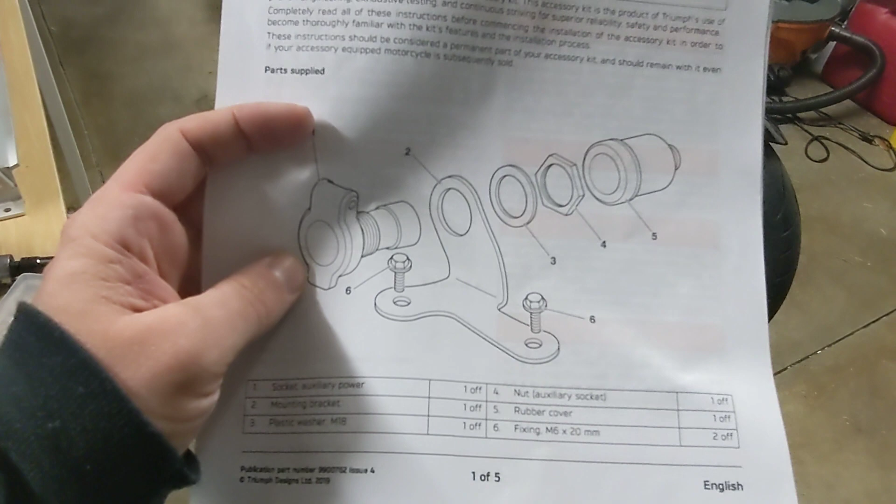This seems a little tricky because the instructions are a bit vague. They just say basically to undo the tank bolts here, tank attachments, and look for a taped up wire.

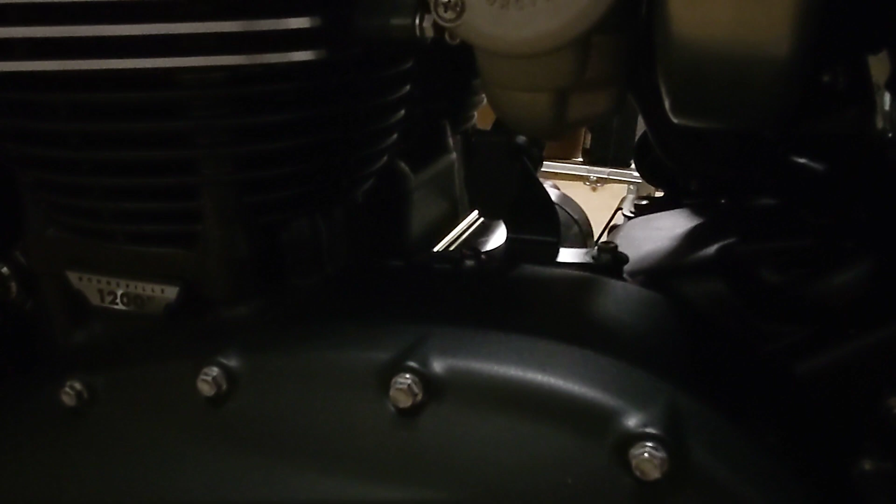Now I'll go ahead and show you the adapter itself. It's right down there. Let me get the light to work in my favor here. There you go. So this is a bit odd to me, the location of it.

I guess it makes sense because it's a slim down style bike. But if you're going to have something powered and running on your bars, then it's going to be a little odd, running a wire up past the motor up to the bars. Maybe a heat resistant silicone wire or something like that would work out okay. But that's just USB if I were going to power that from there.

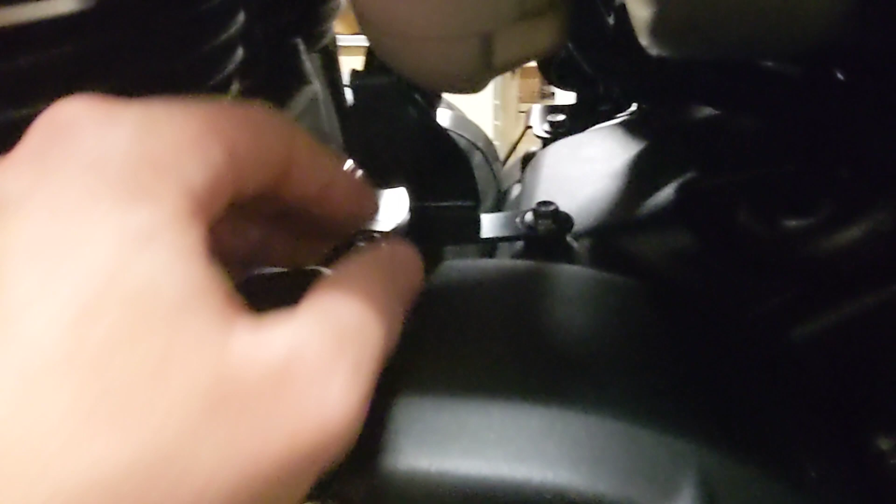It's a good spot if you were going to do heated gear, and maybe that's more what they were inclined to here. So this is the DIN style power adapter. I can zoom in on that. So it's not USB or anything directly - you would need an adapter for that.

Now, my bobber already has a power adapter back here going right to the battery, and this would be like for your trickle charger or battery monitor or anything like that. But that's going directly to the battery, and this one's actually going to the factory connection under the tank.

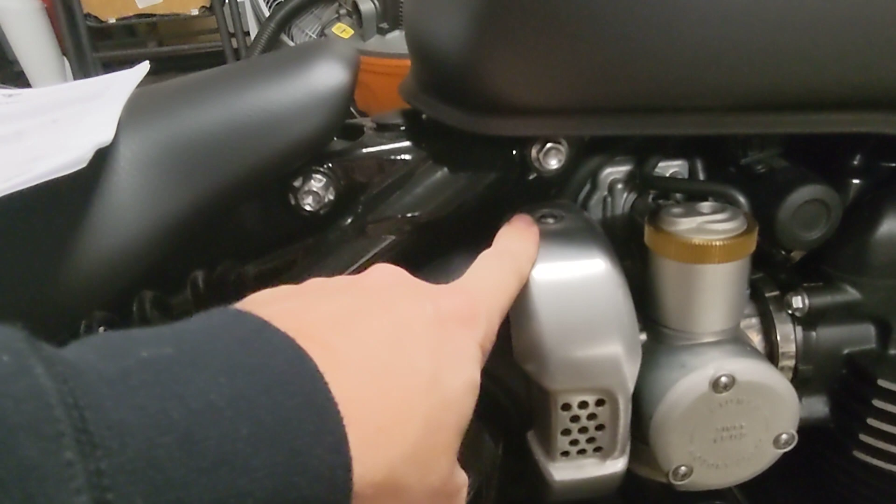When you remove the two tank bolts - I showed you the one on the other side, and there's one here as well. I can't remember the size of the screw on that, but it's in the kit number.

You can find the instructions with the kit - they come with where to go and look for the instructions, at least mine did. I think mine came from Adept Power Sports or something like that, but you can buy this kit at pretty much any authorized Triumph distributor, I think.

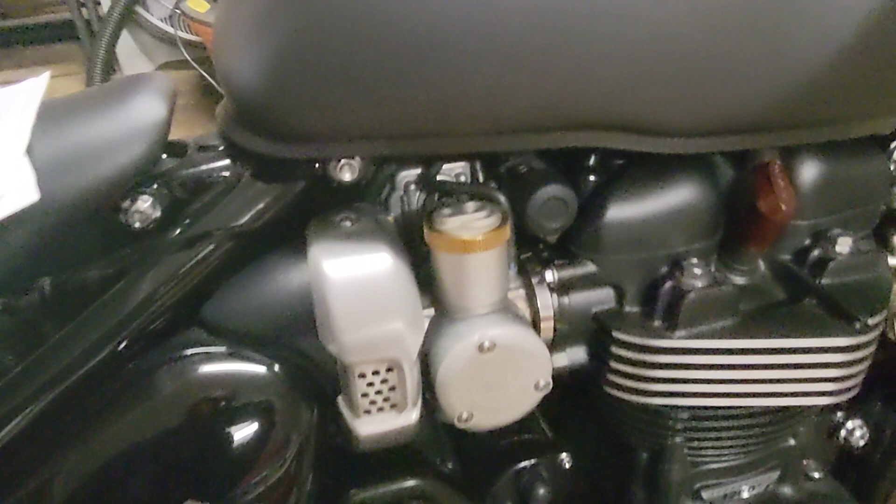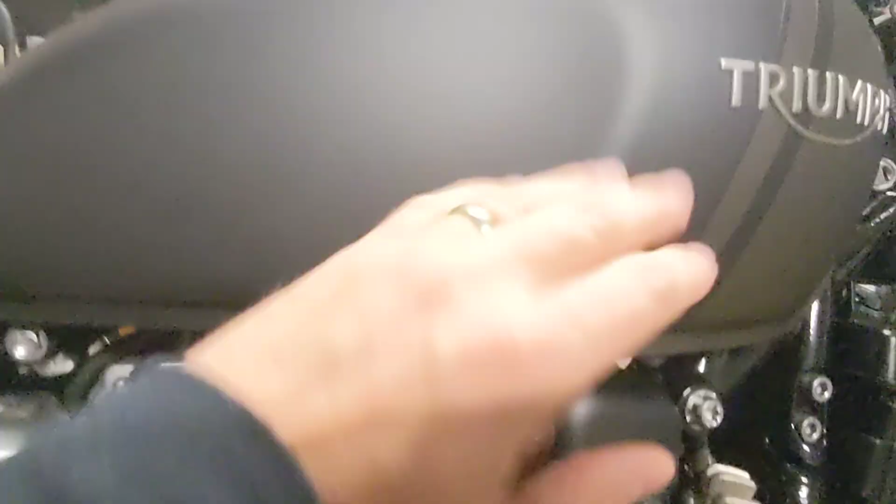So you can see this is what it looks like from the back side. The wire is actually on this side of the tank, so this is the right side of the bike. Right about in this area, I'm not going to take it off now, but right about in this area, it's actually taped up and bundled up on the top here.

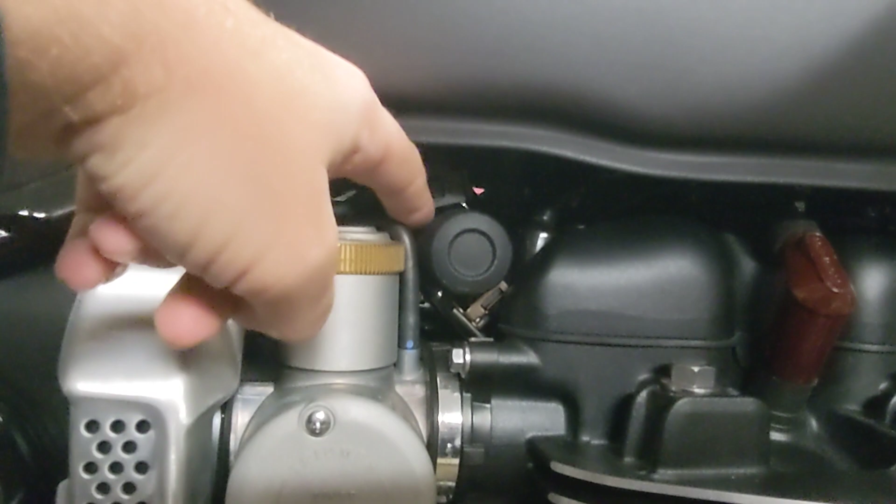At least that's where it was on mine. There's just enough wire for when you take it out - you run it down in between the throttle bodies and the engine block here, and it comes out right here.

Then, as seen right here, this part on the back, number 5 there, is the rubber sleeve, and then that plugs right into the back of the power adapter there.

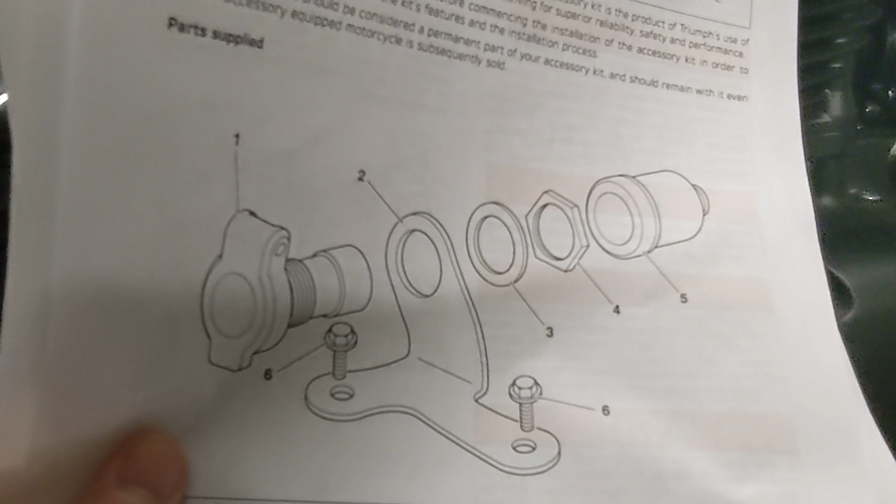Now, there is a clear plastic coating on mine sealing it, and they already had electronics grease on the plug. So all I had to do was cut that clear plastic coating off and plug it right into the back there.

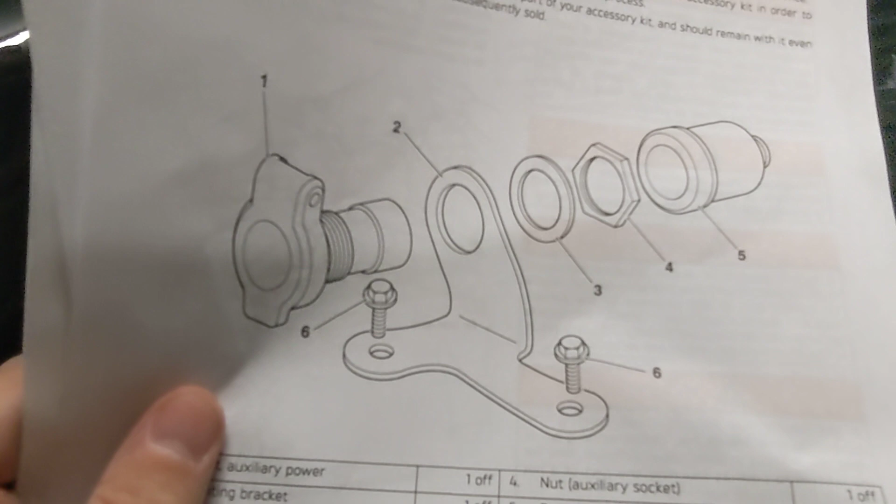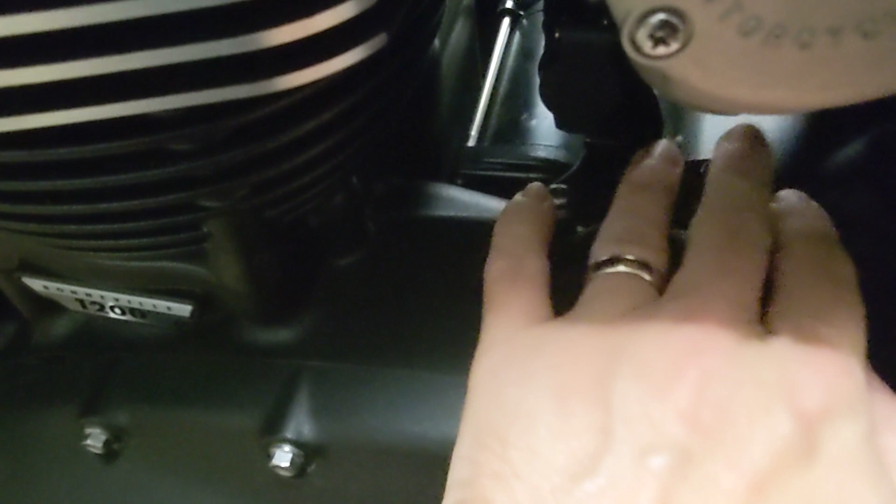And then from there, you just take and 2 bolts on this side, or 2 screws on this side, go right into the ring here. There's 2 plastic plugs that are normally in these holes.

You would just take those 2 plastic plugs out, and whenever you go to put the bracket on, it's probably a good idea to connect it before you try to screw these down, because it's a little fiddly if you try to do it the other way around.

So for me, I wound up disconnecting it, reconnecting it there, getting everything nice and good on the plug, and then securing this down. Just make sure you don't have too much cable or too much tension on the cable in the back if you do that.

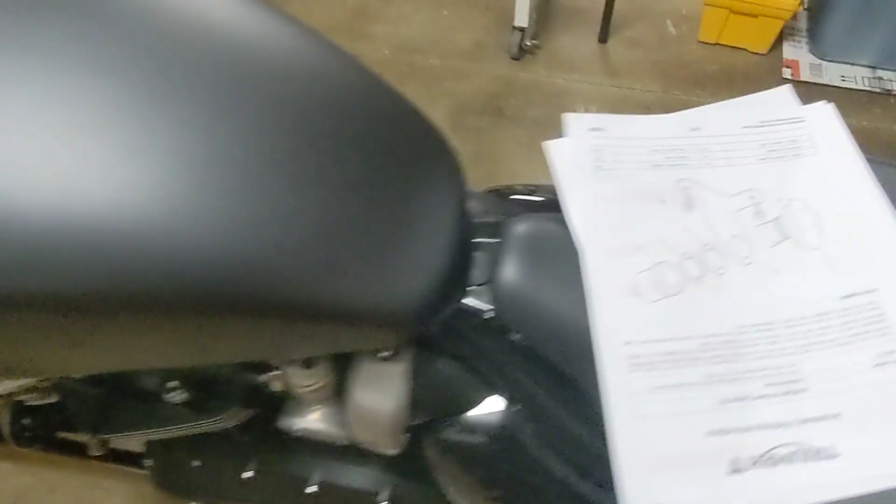So I haven't actually gotten to test mine yet. I did measure it with a meter and it checks out fine, but you be careful doing that because it'd be really easy to short that out.

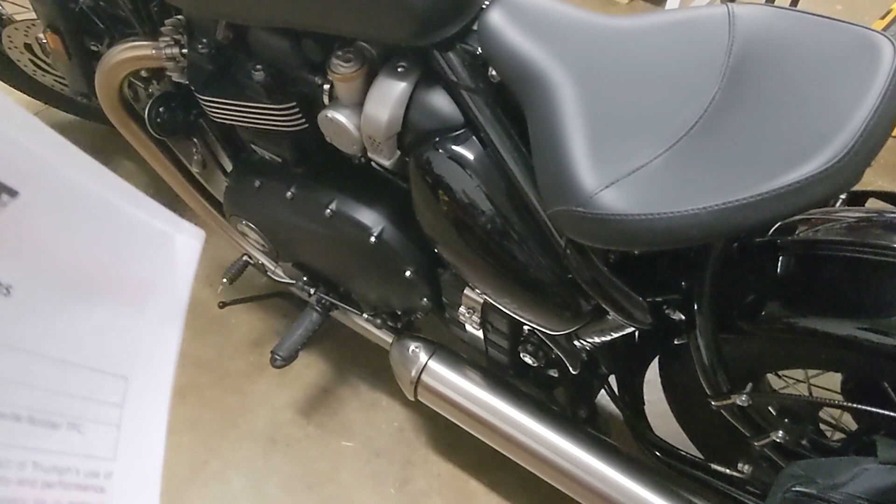They do tell you to disconnect the battery if you're going to do this, and you can pretty easily disconnect it, so that's not a huge deal. I've done that before when I installed my power regulator or my flashing rear light. But yeah, I'm looking forward to trying that out.

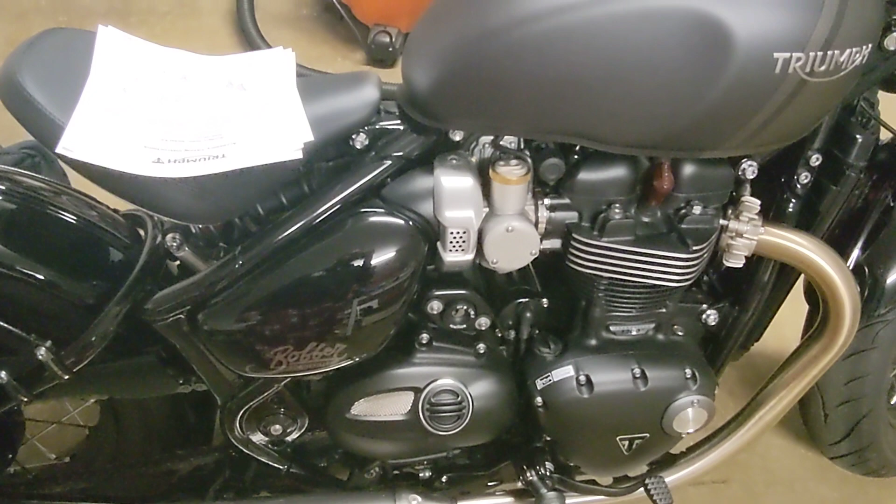I haven't actually gotten to go on the road and test it out yet. I just installed this the other day. I didn't see a lot of content about where that wire was on the bobber, and I forgot to take any pictures. If I can find some pictures I've done with this, I'll try to post those, but I don't think I have any direct ones.

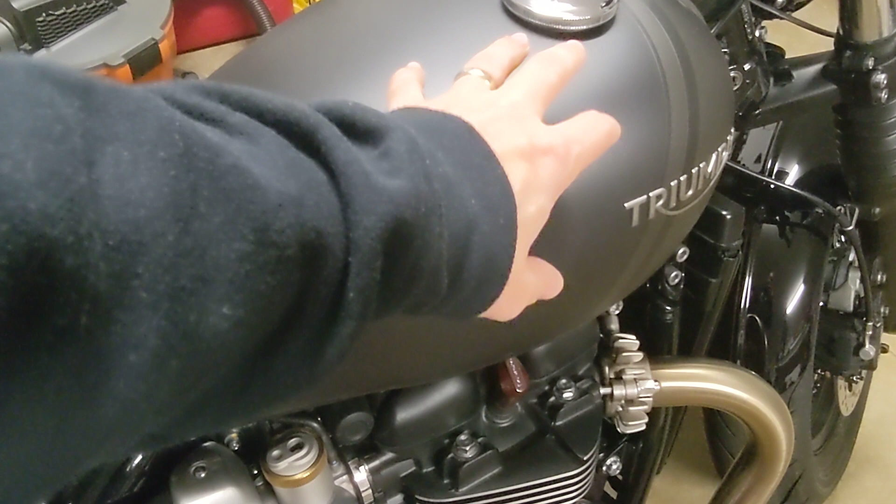But anyway, the tank just lifts up. Once you've disconnected it, you just lift it forward. I put a mesh cloth on here to keep from scratching anything, and then put a wood block underneath to keep the tank held up so I could work with the wiring up here. There's a piece of either red or blue tape - take that off, then run the wire back down through between the throttle bodies and the block, and it all connects up down here.

This took, I was going super slow in the process of doing it, but at most 30 minutes. It was probably faster than that, honestly, for the install. So anyway, I hope that's helpful to someone.

I was a little more worried it was going to be more involved than what it was when I did it. I wasn't too concerned because I've done more complex stuff before, but I just thought, hey, I really want a way to have some extra power on this thing just in case I need it at some point. So really happy with how it worked out.

I still need to come up with a good solution for a temporary connection up to the bars if I ever decide to run some USB off of it for short term. I'll probably never have a permanent connection up here on the bars - I'm really not too interested in that. I suppose it'd be pretty easy to do if you wanted to.

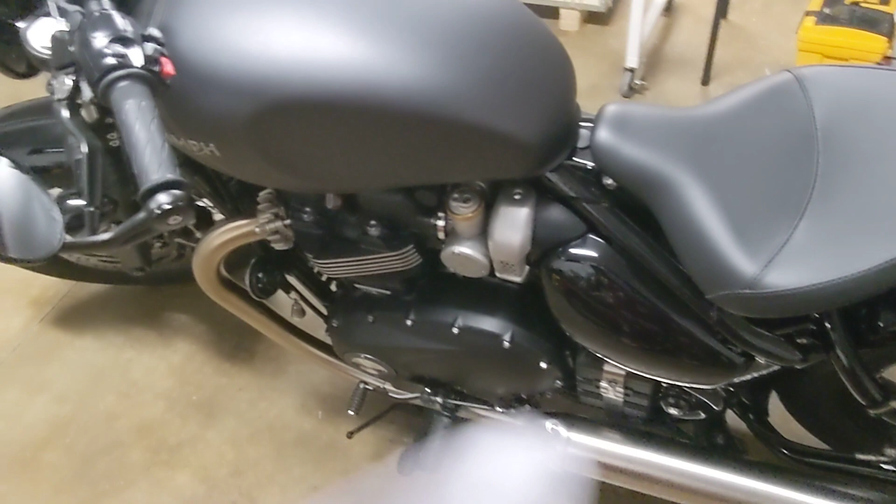But for me, I don't usually go out on a lot of long rides. In fact, usually when I ride, I don't even have my phone on here. The only time I do that is usually GPS, or if I'm wearing something where it doesn't fit in my pockets well, then I'll clip it up here just to store it. I'm one of those people who just doesn't use my phone all that often. If I do, sometimes I listen to music in my helmet, but a lot of the time it's more like GPS going to the audio in the helmet, or I'll have the GPS on the bars, and that's really one of the few times I have it up.

I know different people have different opinions on how they do that, but it's definitely good for me to have some GPS sometimes. I am directionally challenged, to say the least.

But yeah, I'm looking forward to trying that out, and I hope that at least the basic overview of where to find the connector and all on the bobber is helpful.

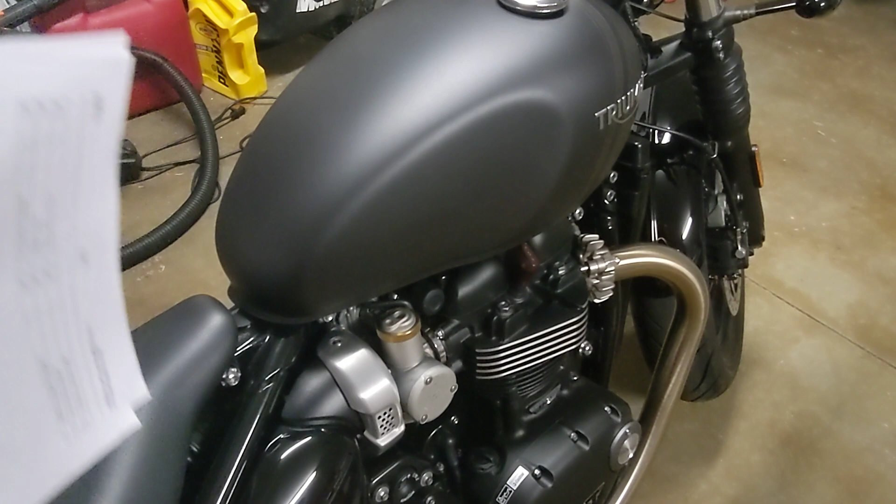A lot of people ask me when I've talked to them about it before, do you absolutely have to lift up the tank? Yes, you do. But when you lift up the tank, there's plenty of room, at least there was on mine, and it wasn't all that hard to find the cable.

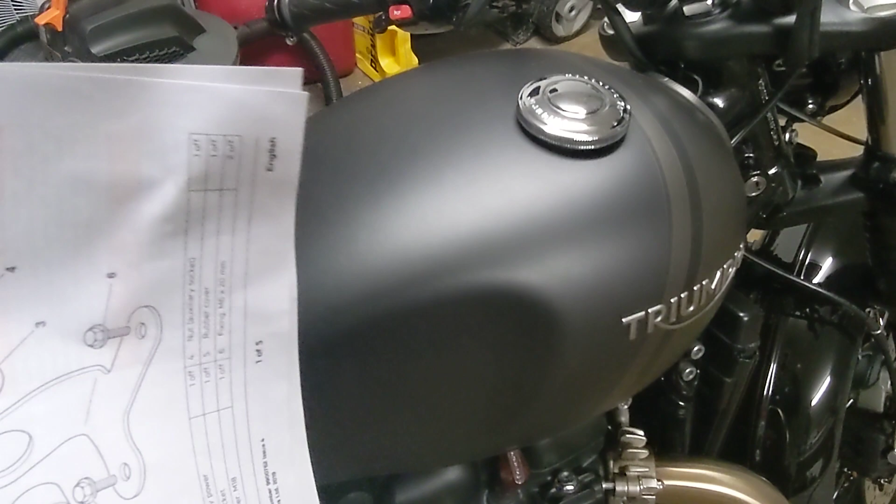You did have to kind of feel around up in this area some. There was quite a lot of cabling there. But once you find the loose connector, you can just run back and find the tape, and it's real easy to take off once you've done that. Once you found it all, it's not too bad.

The trickiest bit of the whole thing was probably getting it - it was pushed so far forward that getting it to sit flush against the top of the engine, and then going back between the throttle bodies, that was tricky. I know somebody's going to say, well, you shouldn't have it with the heat right against the engine, but that's actually in the instructions. They actually tell you to run it exactly through the path of where I ran it through.